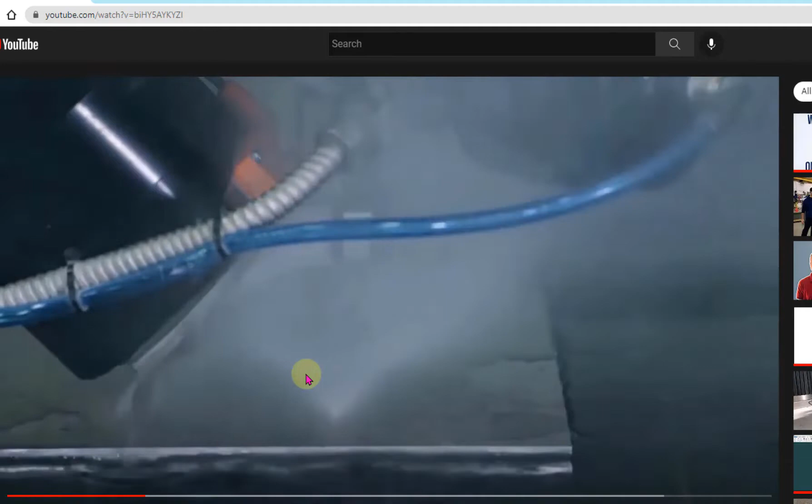Today we'll be taking a look at how to program our Apex 60 5-axis head using our optional IGEMS package. We'll look at some of the nuances with the programming, such as placement of leads and programming the height setter that was just shown in this video here.

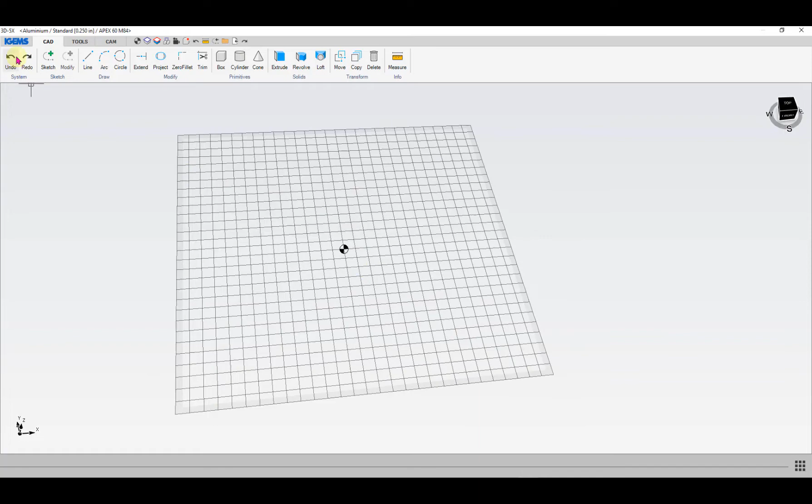And if we want to open up a 3D file, top left hand corner, IGEMS menu, open, and normally you click on open and navigate to where you've got your file saved. There's also some samples here that you can play with, so we'll start with a fairly simple one here. So depending on how it's drawn, it might bring it in like this. So then you can choose how you want to orient it on your table.

Cam tab, you've got this align button here. So down at the bottom gives you some different options as far as how you want to align this to your table surface. If I click on this surface here, for example, it'll just lay the part down like that on the table.

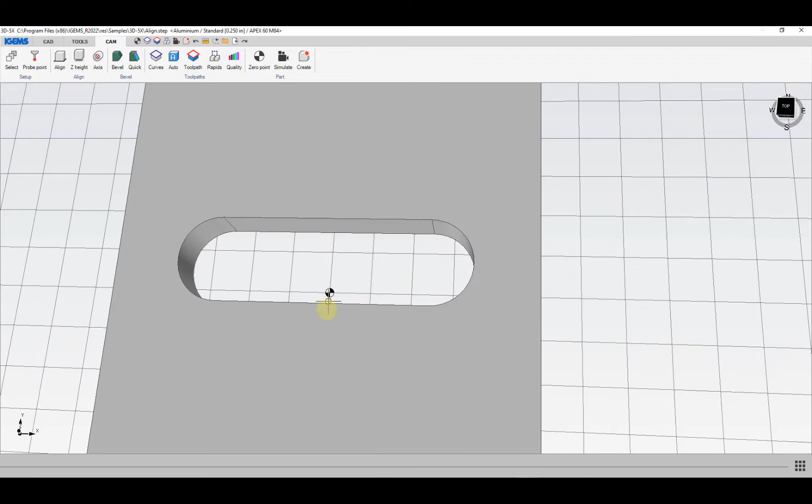So the first thing I usually suggest doing is setting the 0 point where you want it on your part. Right now the 0 point is here. Normally we're going to set it at the top of the part somewhere, and usually lower left hand corner if we're just doing a single part. So I can click on the 0 point button here, and since my snaps are turned on, when I come close to an end point, that little red square shows up, and I can just left click and move my 0 point to the top of the part, lower left hand corner.

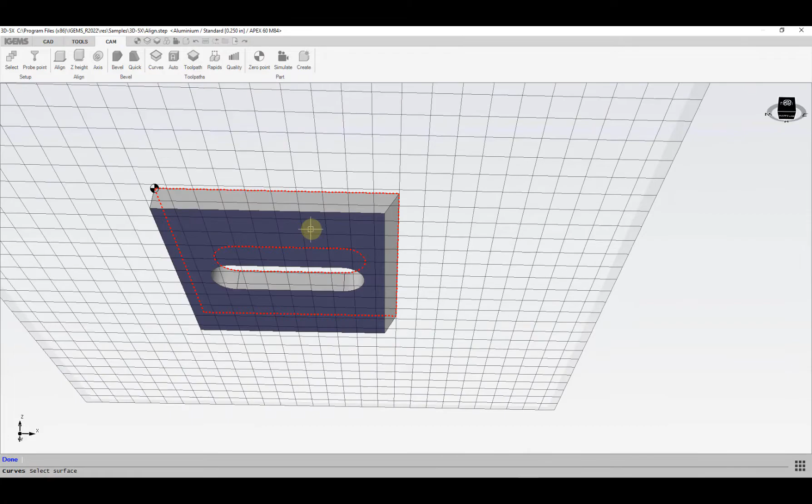And then we can go through and pick edges that IGEMS will use to project the toolpath depending on what angles it sees in the part. So to do that, we've got this curves button here. A couple ways of finding those edges. For a part like this, the easiest thing is probably just click on pick surfaces, and I can click on the top surface and then spin this around and click on the bottom surface, and it highlights in red those edges that it finds in the part. And once you've got that, just click on done.

It shows the different edges that it's found in the part. You can choose additional edges if you need to with these different options over here on the right. And now we're ready to add a toolpath. You can either click on this button here to take you straight to the toolpath area. If I click on close, I can also use this icon here to get to the area where I can add toolpaths.

So in this box here, we've got all our settings for the toolpath that we'll add here, working from the top down. Cut type is basically how IGEMS is going to create the toolpath. Normally you'll have this set as ruled, where it'll look at the top and bottom edges that we just selected to determine the trajectory of the stream. You can do a fixed, where you can just give it an angle and you really only have to give it the top edge, and then you specify the angle that you want the cutting head to be fixed at.

And then variable uses the top edge and then gives you a lot of control over how that stream goes after it goes past that top curve there. So most of the time you'll leave that as ruled. And then tool position is normally for most sheet cutting going to be set to fixed Z. If you're cutting something like a dome or something that's got some 3D shape to it, you can set to follow, and then the Z-axis will move up and down to follow the curve. But most of the time we'll just leave that as fixed.

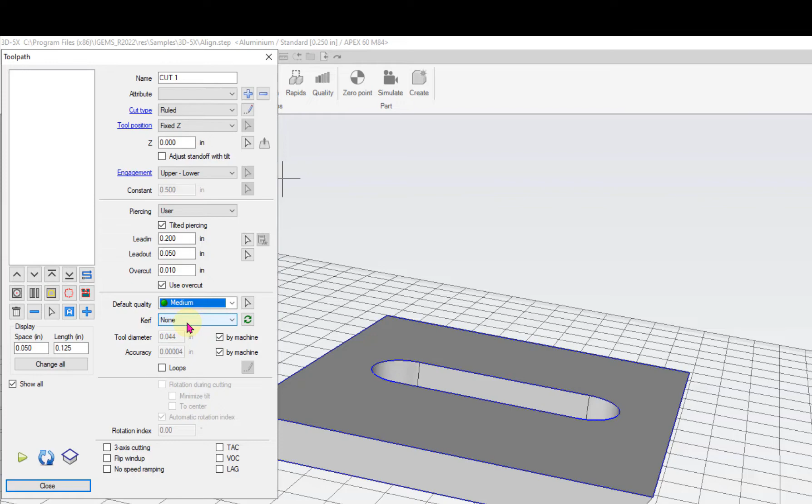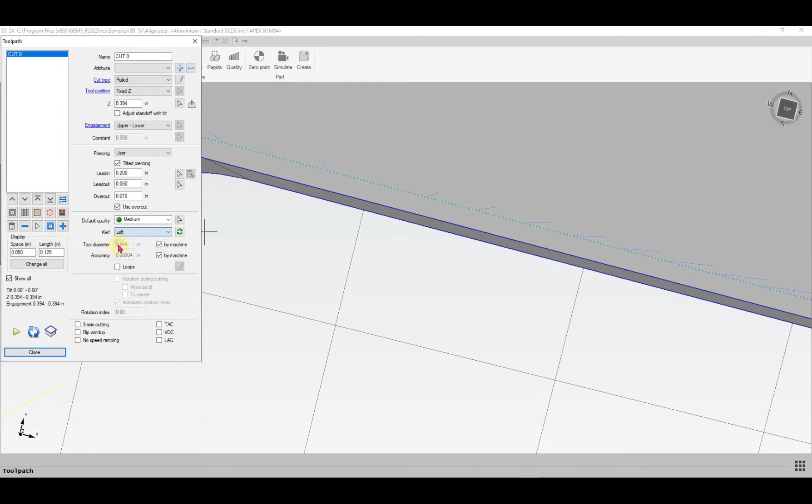So if I click on the auto button and then I left click, it'll use those settings and add my toolpath on there, and I'm just going to hit enter so we can go back and look at this box. The key thing to look at here is kerf. Right now kerf is set to none, so this green line represents the center of my stream. So if we were to cut this, this slot would end up being a bit oversized by basically half the kerf width on each side. If I set it to kerf right, that's where we would want it based on the direction of travel. You want that green line to be offset into the scrap area. And if we set this to kerf left, then we would end up being oversized on this slot by twice the kerf diameter. So we'll set that to kerf right.

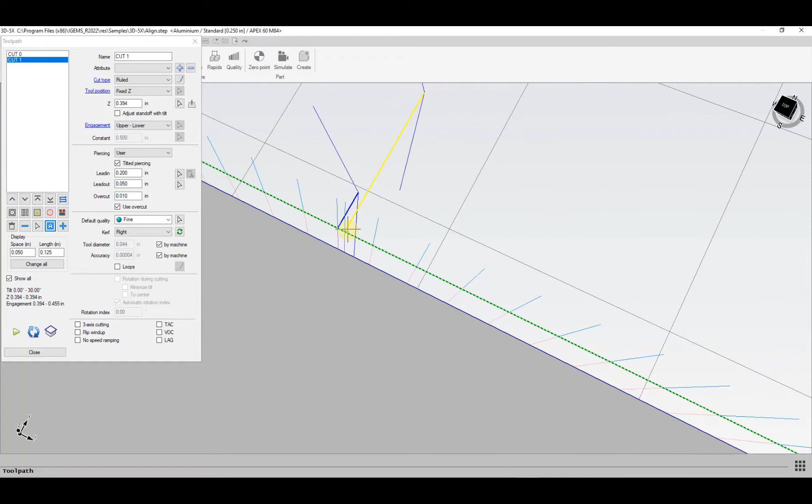If we did want to change the quality, you can click down here and choose a different quality. If we want to use those same settings for the outside, I can click on the auto button again and left click where I want to add that lead in. So we've got the lead in, and then in this case here we're actually going counterclockwise around this outside cut. You can see this overcut, so it's going to come around this outside cut, cut past where we led in, and then do the lead out. So because we had told it to kerf right on the previous cut, it carries over the kerf right and then changes the direction of travel to keep that kerf on the outside of the part into the scrap area.

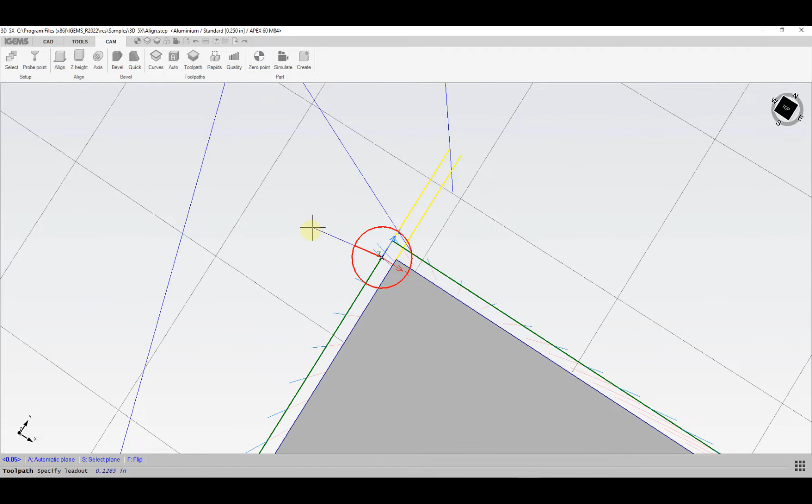If we want to change our lead position, if we wanted it on the corner here, you can click on this little button here and left click on where you want to have your lead. And then if you want to change your lead angle, we'd probably want to come in tangentially down this left edge here. This red circle represents that 0.2 of an inch long lead in that I specified, and as I move my mouse around I can determine the angle I want to lead in at. So if I want to go straight into that edge when it locks in at this 12 o'clock position, I can hit enter, and then for the lead out when it locks in at this 9 o'clock position, I can hit enter. And because we're using overcut, it's actually going to come around the corner, which we wouldn't want to do on a corner, so you can turn that overcut off and it'll just lead straight out on that corner there.

If I want to change quality, I can come down here and choose a different quality. If I want to do one edge at a different quality, I can click on this little pick button here, and it shows me right now that that cut is in the green medium.

So if I wanted to do an edge a little bit faster, I can choose a different quality, and I can left click and left click and then move my mouse around to indicate which portion of that outside cut I want to apply the rough quality to. In this case here I want to apply it to that portion of that edge. I left click and that locks that in there. And then if I'm done, I can click on done and then close.

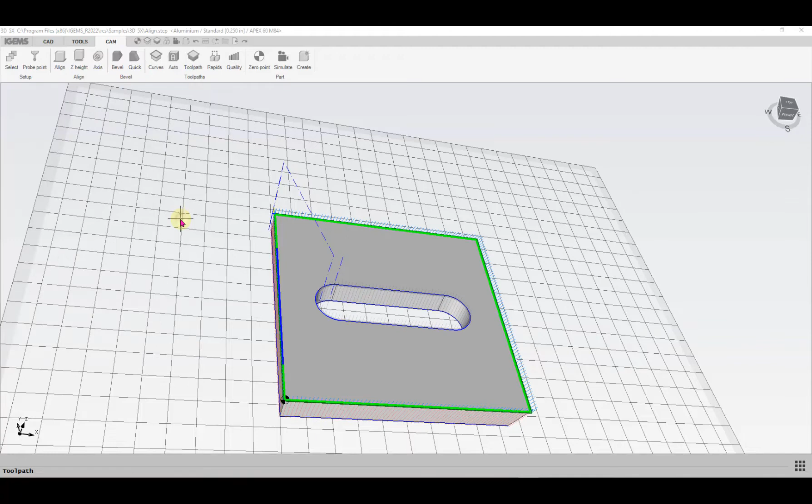If you have a cut that's got different qualities on it, the color of that little icon changes. So in this cut here, this is all at the fines, so that little icon is that color. This one changes to indicate that this has multiple cut qualities on it, and then if you click again on that, you can see where those qualities are.

If this were a smaller part and we didn't want it to fall into the tank or tip up, you can add tabs on here. You can have a tab at the lead in lead out point. In this case here on the corner, you'd set your lead out length to 0, and then you can check that use overcut box and then put in a negative number to leave a bit of a tab there, depending on how big you want that to be. As you change that, you can see where that toolpath is going to stop.

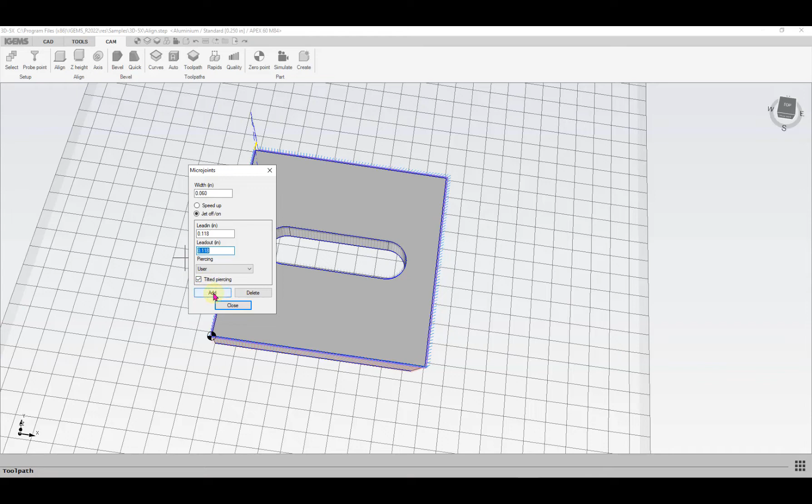If I wanted another tab on this cut, maybe on the opposite corner, somewhere over here, you've got this button here for micro joints. You can click on that. It brings up this box here where you can specify the width of your tab and then what you want to use for lead in and lead out for that tab. And again, just make sure you always have that tilted piercing box checked here. Click on add, and then you can just left click where you want to have the lead in lead out.

If you want to get rid of that tab, click on delete, and then as you hover near it, when it turns red, you can just left click on it to get rid of it. Once you've got the toolpath the way you like it, you can click on the close button.

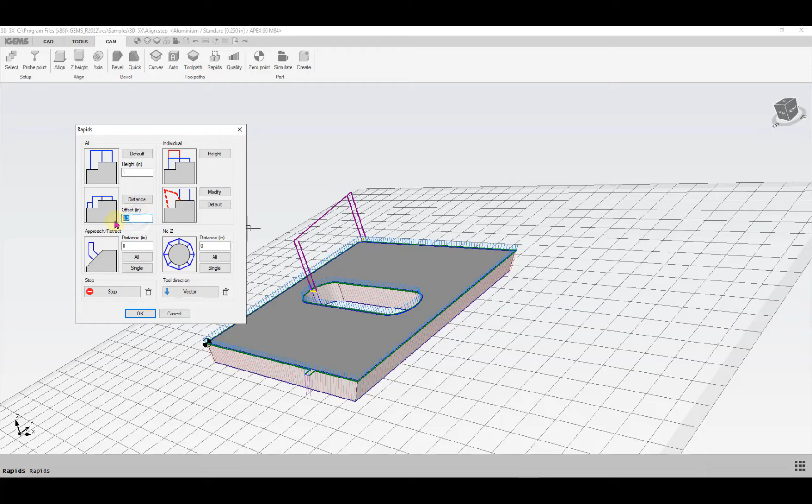And generally the next step will be to adjust rapid heights. You can click on this rapids button here, and right now it's lifting 1 inch between these cuts. If you want to change that, you can click into this box here, click on distance, and then those heights will change. You can also use this height button here, and as you hover over one of the rapids, you can type in a new number, or you can just visually drag something up and down if you just want to approximate a lift height. Click on default, and it'll set it back to where it was originally.

If you want to add a stop, maybe you wanted to stop the machine before it did this outside cut, so you could check this first cut. You've got this stop button here, and it prompts you to select a rapid. So I want to add a stop going from this inside slot to the outside cut, so click on that line there, and then you can either add the stop here or here.

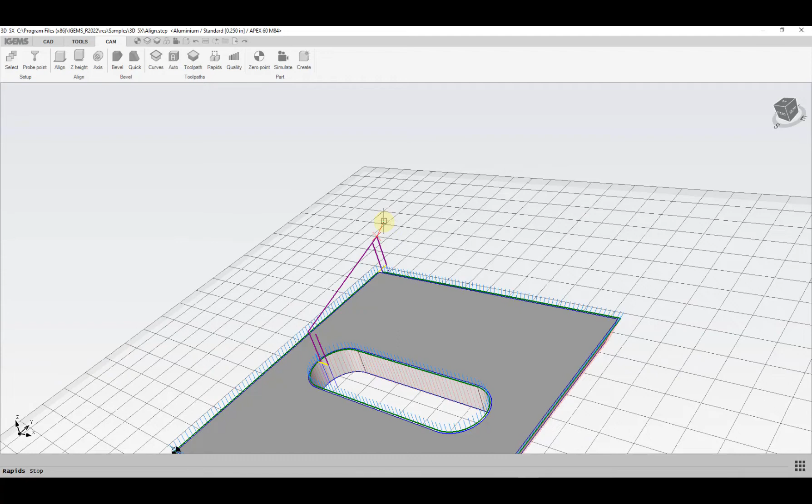So if we wanted to be able to see this slot, we'd probably want to have the stop here so it rapids a little bit out of the way, so you can left click and it puts in a stop command, and you can make it either an M00, where it's a hard stop, or M01, an optional stop that you'd have to turn on in the controller to actually have it stop at that point. If you want to get rid of that later, you've got the little delete button here, and it goes away.

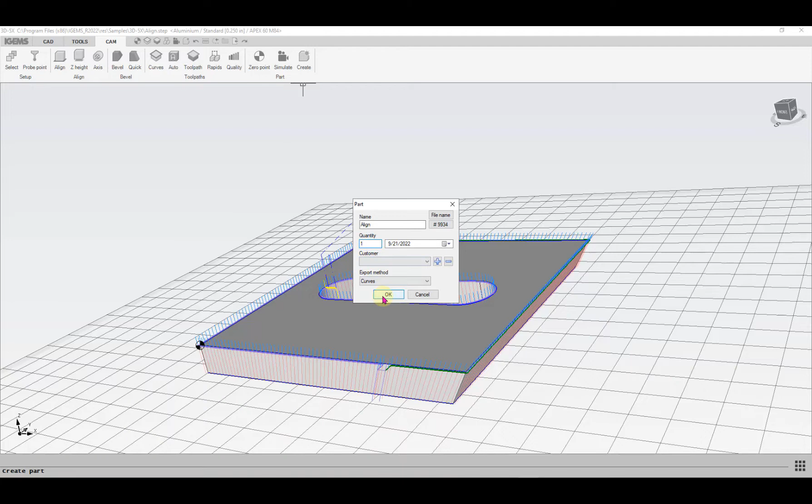And if we think that we've got things the way we like it, you can click on this create part button here, click on file name, and it'll pick up the name from the step file. You can specify a quantity for nesting now or later. I usually just set that to 1 and then change the quantity when I get to the nesting, and click on OK. It brings it out into our 2D world.

So if you're going to cut just one as your initial prototype test piece, at this point here you'd click on this order button on the cam tab back here in the 2D world. Down the bottom it prompts you to select cut order parts, so I could just select this part and hit enter. And the key thing here is you want to make sure that you click on this part button, and it'll pick up where we set that 000 point from the 3D area.

If you don't do this, then your cutting head is going to end up being too high off the material, because it's going to be basing all the values off of basically the top of the table, and it's going to add the material thickness onto your Z heights. So make sure you click on that part button, and it should show the thickness of your model at this point here.

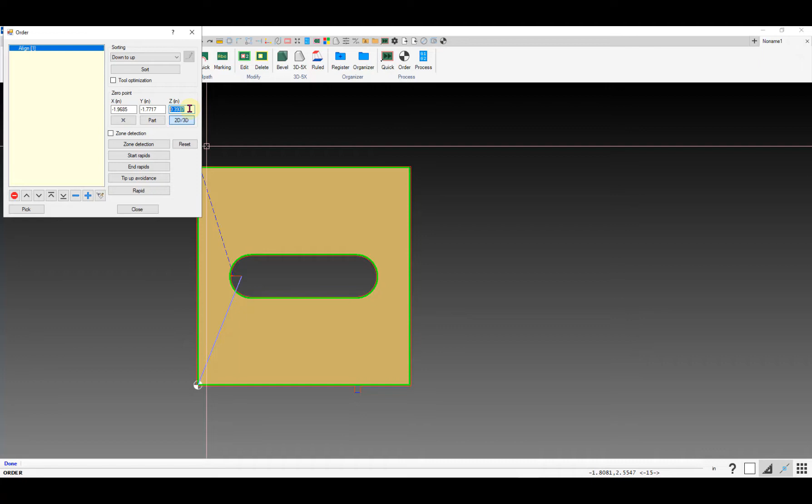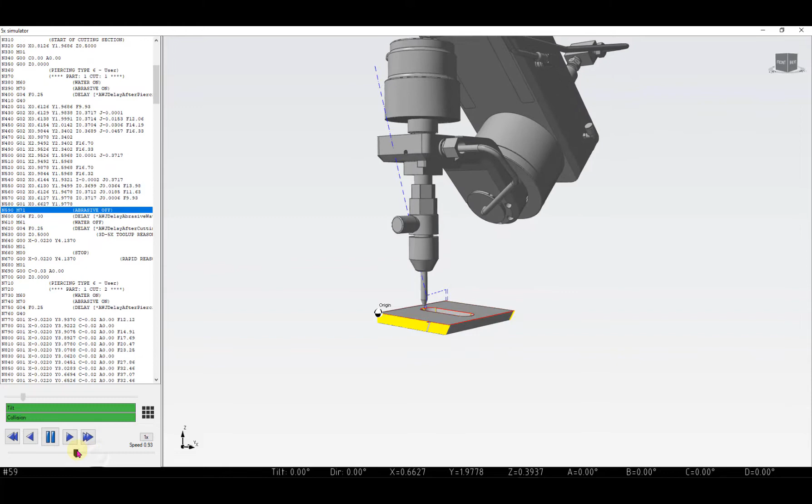And then click on the play button and get a preview of the code. So this is nice to be able to simulate and see what the cutting head's going to be doing. Got the little slider down here if you want to speed it up or slow it down. So we do our pierce, we'll come around and it starts tilting over. We got our little tab that we added on there. So it'll stop, re-pierce, and then continue on.

And if we look back in the code, here's that M00 that we put in there, that stop command going from the first slot to the outside cut. Now if you want to make any changes to that part, it's sometimes a little bit tricky for people to figure out when they first start working with this, because their inclination is going to be to click on the 3D-5X button again, which just brings you into an open empty workspace.

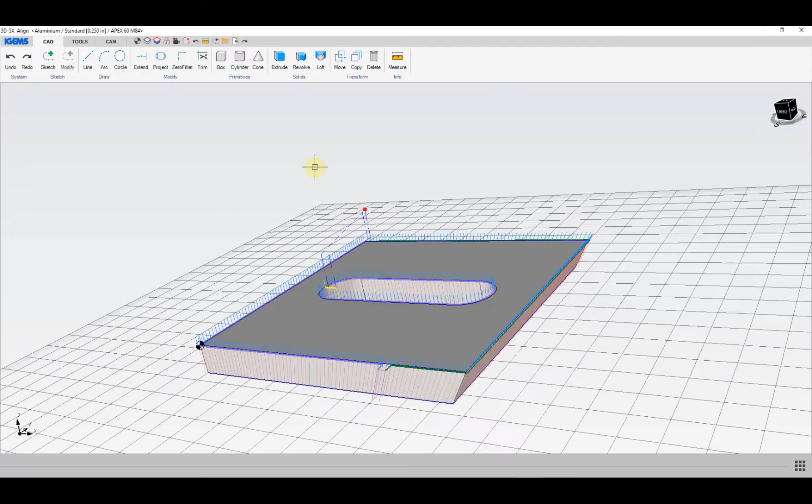So if you want to make any changes to this part, you double click on the perimeter and it brings you back into that 3D area with that part. So if I do make some changes, like I decided that I've cut my first part and I'm happy with things and I want to take out that stop command, I can go back to our cam tab, and in this case again the stop commands are under the rapids button, and I can click on delete and it goes away, click on OK. And then to update the part, I would click on create, and update part will update the part.

If you wanted to have a new part, so you'd have one part that would have that stop in there, and then a new part that doesn't have it, you click on the new part option. So we'll do update part and OK. And now that will not have that stop command in there anymore.

So now we'll talk a little bit about rewinds and singularities, which you have to pay attention to when you're programming the Apex 60 head. So if you're looking down on the Apex 60 head, these numbers here would relate to the C axis or clock axis for spinning the head around the Z axis. We can go anywhere from positive 270 degrees to negative 223. So those are the C-axis limitations.

So when it comes to placing your leads, you want to place your leads in such a position that you're hopefully not going to hit either of these limits depending on the direction that you're going around the cut. And if you are pointing to the left, like the left wall of the tank, that would correspond with a C angle of 0 degrees. And if your stream is pointing to the right as you're standing in the front of the tank, then that would correspond with either positive 180 or negative 180.

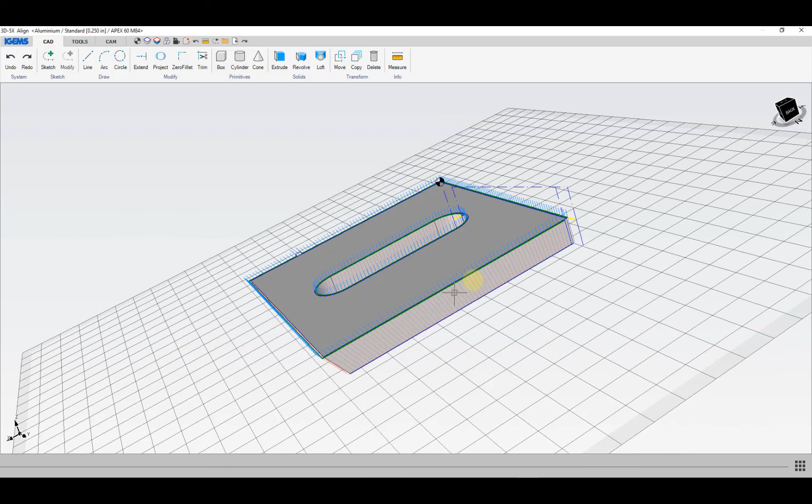But if I rotate this part, we should be able to get a singularity here. So if I go to my CAM tab, and on this Align submenu, click on Rotate, and we'll try going negative 90.

So here as it's cutting along this direction, the cutting head will be pointing towards the back of the machine, so that should be C of negative 90, and we'll be tilting through that 10 degrees on the A, which should give us singularities on each side here.

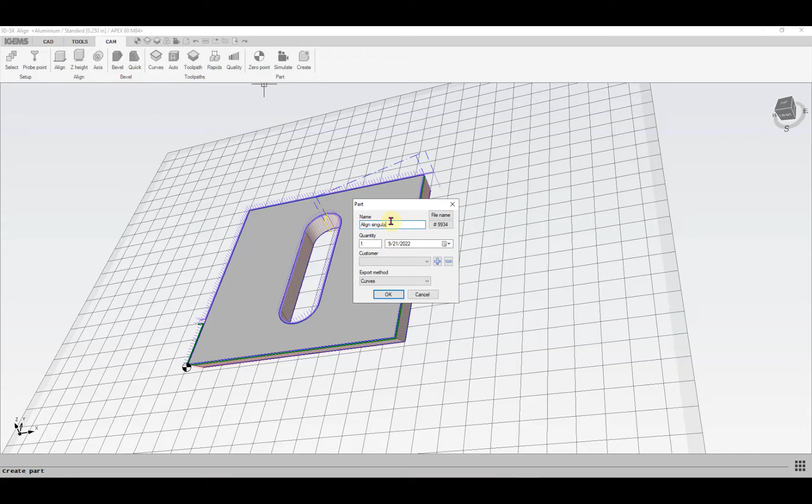So we'll go ahead and create the part, and we're going to do a new part. Original part on the left, new part here on the right. We want to set our 0 point again, make sure you click on that part button to pick up the 0 point from the 3D area, and we'll process it. This time it wants to know which one we want to process, so click on this dotted line here to tell it that this is the one I want to work with, and see what the simulation shows us.

So we got 2 singularities, and it shows you what line in the file it is. As we scroll down here, coming along this edge, our C is at negative 90, and the A is going larger and larger, passing through 10 degrees. We'll have a singularity, the cutting head will spin around there and probably give us a ding on the part.

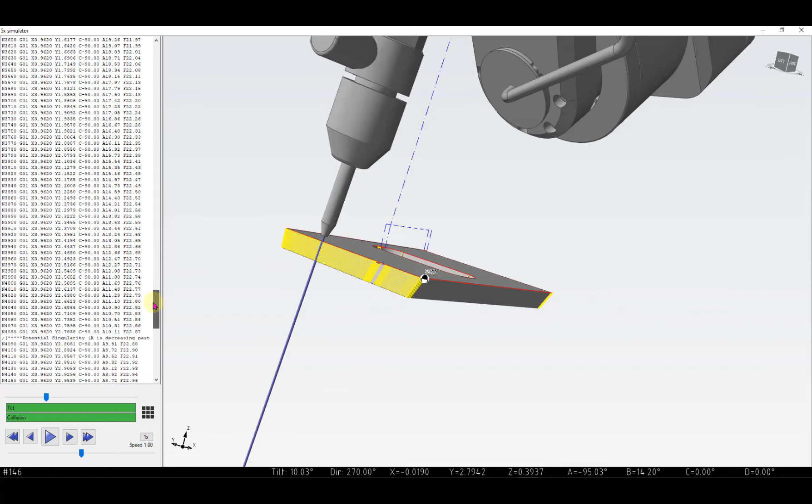And then after it re-pierces after that tab, going up the other side, again here the A is decreasing and passes through 10 degrees with the C at negative 90.

So just want to be careful about that. If you have a part where you can get singularities like this, then when you nest it, you want to make sure that you set the rotation to none, because you don't want the nesting to rotate this part and give you singularities.

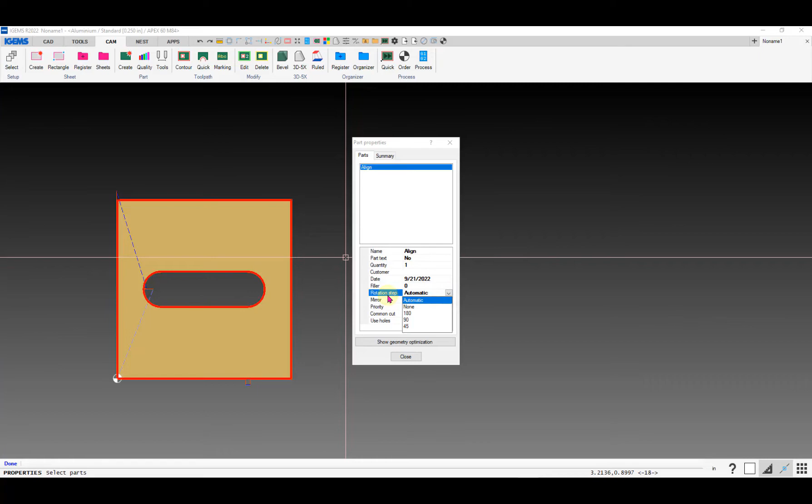So to set that rotation, on the Cam tab, Parts submenu, Properties, you can click on the part, hit enter, and change your default rotation step to be none. That way when you nest it, it won't get spun around and give you singularities.

So let's go ahead and nest this. We'll just nest 10 of them. As you can see, the rotation step is now none. We'll give it a sheet size here, and actually change my start corner. Stop and OK, so they'll all be in the same orientation as the original part.

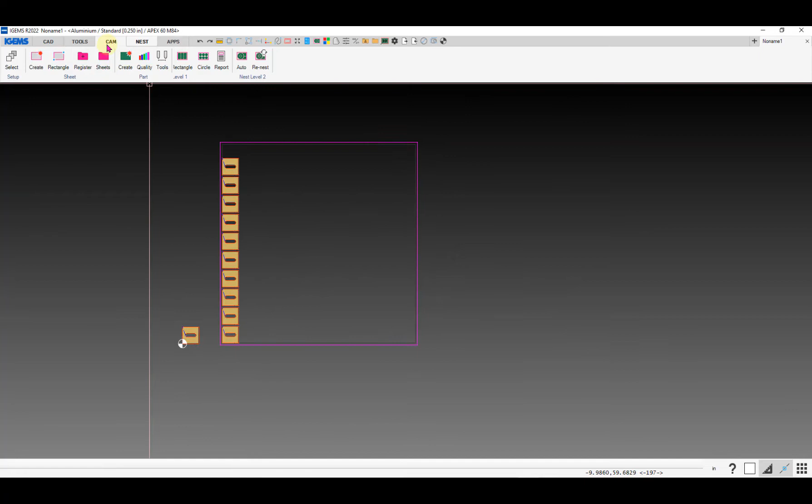Key thing when you nest 3D 5-axis parts: when you do the order button for the sheet, rather than clicking the part button, because if I click on the part button, it's going to move my 000 point to the corner of that part. Ultimately, we want it on the corner of the sheet.

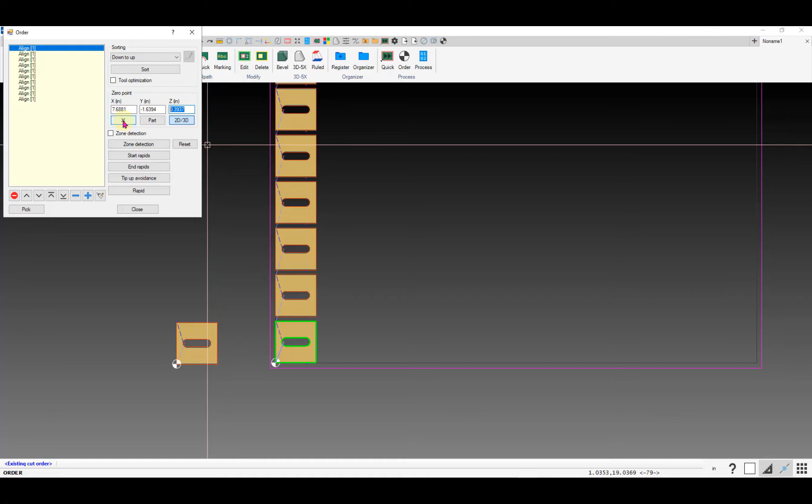So let's undo what I just did there, Control Z, and set our 000 point again here. Rather than clicking on part, if it's a nest, what you want to do is click on this 2D 3D button and use the thickness or Z value we had from the individual part. One way to do that is click on the part initially, highlight and copy that with Control C, then use this pick button to move the 000 point back to the corner of the sheet. Click on the 2D 3D button, and then you can Control V, paste that value back in there.

So if we go down to the bottom here, got no rewinds, no singularities on that entire nest. That's good. So if you were to forget that step as far as changing that Z on the nest...

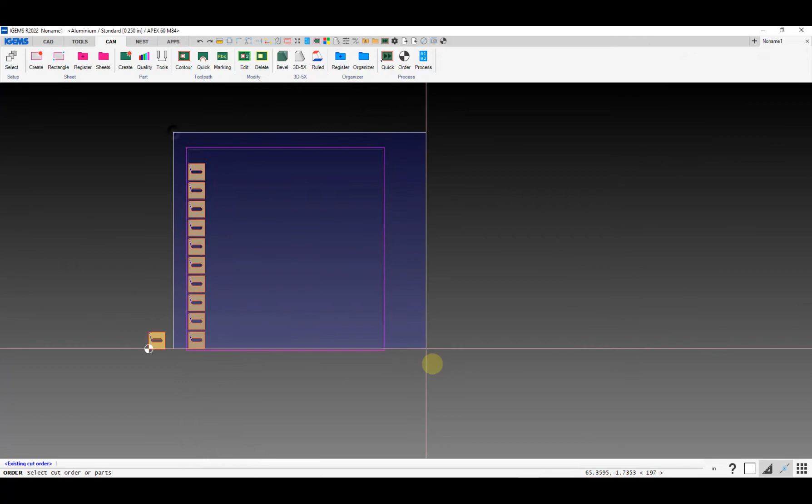I have built a warning into the post processor. So if I just click close at this point and then go and process it, you will get this warning here: check 000 position. Either you've got your 000 position in the wrong location on the 3D-5X part, or when you did the order command you forgot to move it to the top of the part. So that's a little check there that I've built in.

So you would then go back in here again and click on this and plug in that thickness.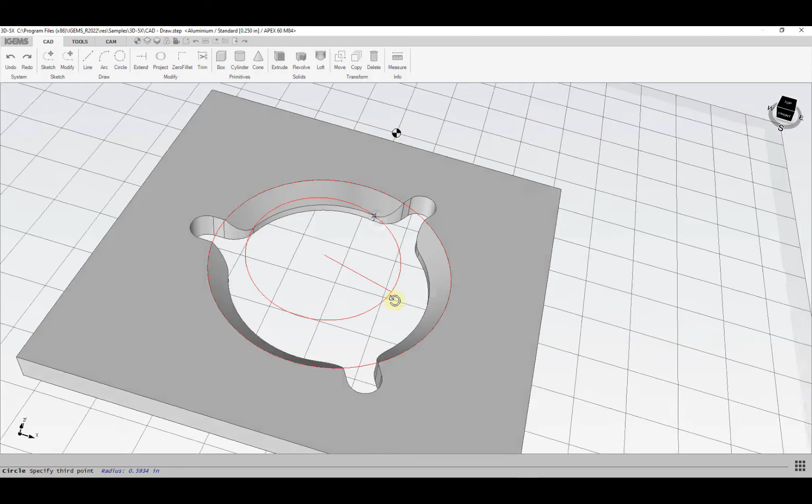But on the CAD tab, we've got some tools that allow us to draw in some lines and things if we need to, some construction lines to work with. So I'll use the circle command here. It's a 3-point circle, so if I pick 3 points along this top circle here and then hit enter, do the same thing on this area here, pick 3 points. Now that we've got that, we can go ahead and pick some edges.

Other thing to note on this model here is it's floating off in space. So on our Cam tab, you can do the align like we did before, or you can also use this Z height button here. Right now the bottom is 0.197 off the table, so we just change that to 0, and that's another way to get your part position where you want it on the table.

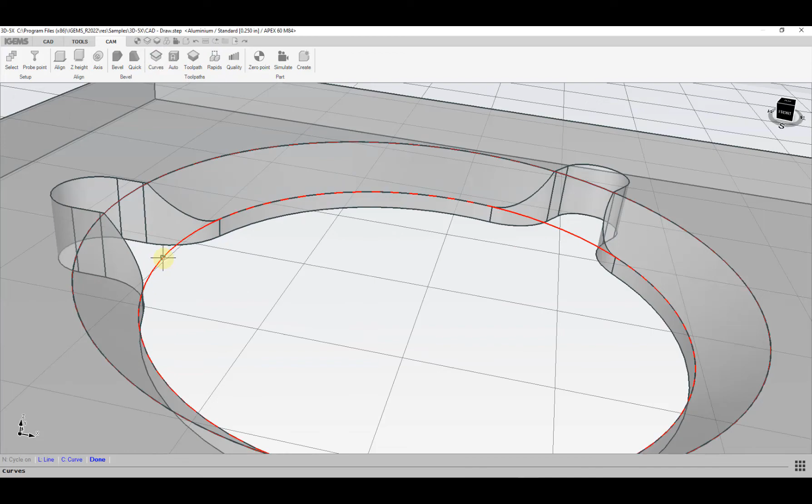And then move our 0 point, so we'll do the 0 point command and stick that at the top of the part, lower left hand corner there. Then we'll go ahead and click curves and pick edges, and we'll choose that as one edge, and then we'll choose this as the other edge that we need for right now. We'll come back and do the vertical cuts later.

So now I've got that, can go to our toolpath area and see what we got for settings here from before. Length of lead in, we're not going to be using any overcut. Yeah, we'll use overcut on this here, so we use overcut. We'll go ahead and set this to be kerf right. Click on our plus button, upper curve, this one will pierce here. Gonna hit enter because we're gonna go all the way around here. We'll go clockwise and then choose our lower curve and do our lead in and lead out there.

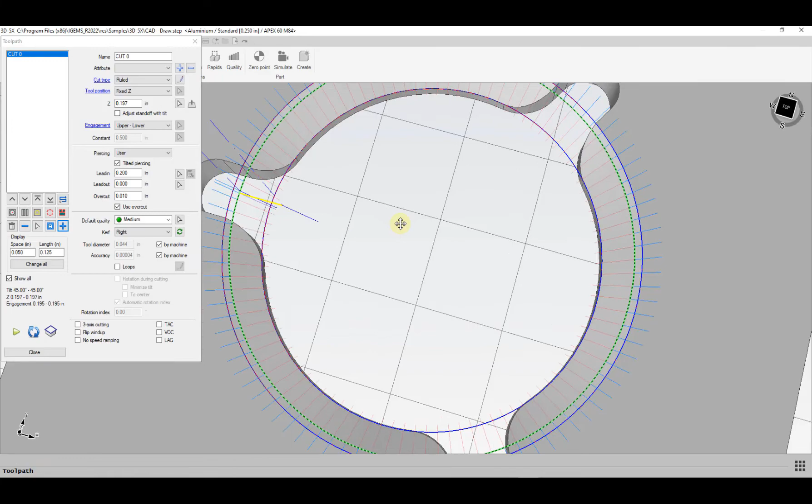So we'll go ahead and close, and for rapids we'll adjust our rapid heights. We'll just do a little lift there, and then create part, click on file name, click OK. There's the new part. So set our 0 point, make sure you click on the part button, quick process.

Here we see we have no rewinds, as I would expect, because we are pointing at the beginning here, pointing at C of 180, and since we are going clockwise, the C value gets smaller and smaller, and at the end of the cut we end up at negative 180.

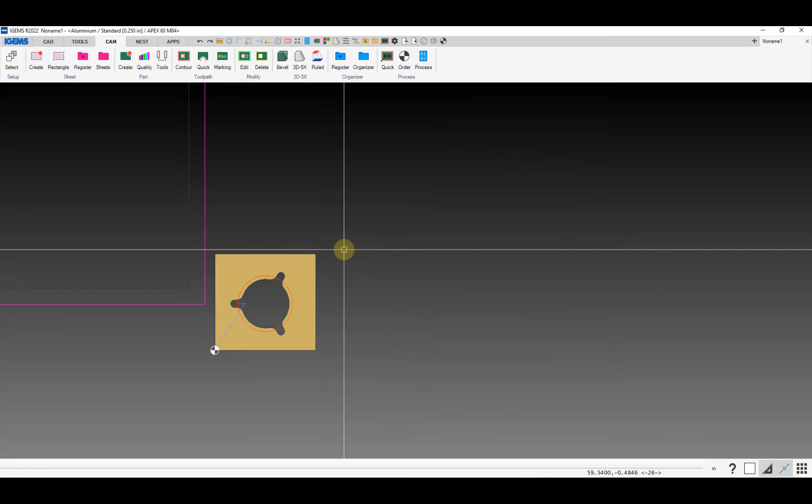However, if I do rotate this part, or if when I was in 3D-5X I'd put that lead in the wrong place, I'll just do R for rotate, and we'll rotate this 180 degrees, and then just set our 0 point again here.

So now we got a rewind, shows you what line it's at, and now we've got the C starting at 0 and it gets smaller and smaller, and then once it gets to around negative 223 it'll do the rewind and then picks up again. We've got a little bit of a buffer on that negative 223 number, which is why this one stopped at 213.

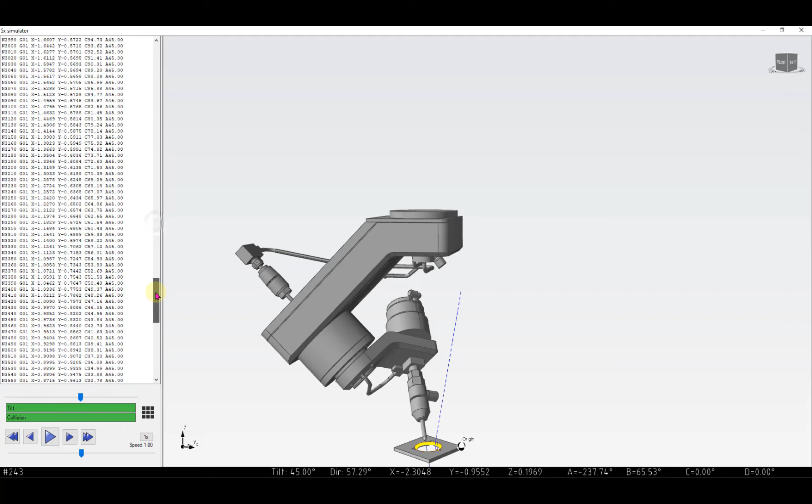So that's rewind. Again, to fix that, if my part were already programmed in this orientation, then I could double click on there and change the part in 3D-5X. Of course, this is the original orientation of that part.

But if I rotate it in here 180, this orientation would give us that rewind, so then I would come in and again use this pick button and put my lead in somewhere over here and avoid that rewind.

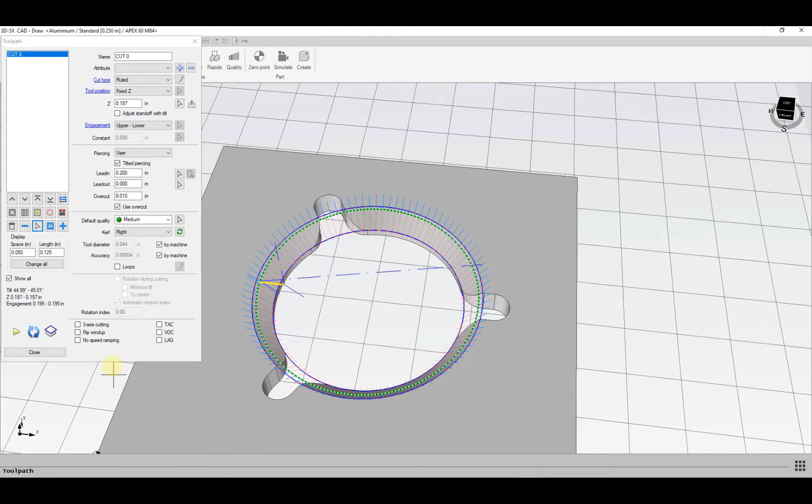And since we're here, we'll go ahead and program this vertical cut. This is kind of an interesting one where that cut is going down below the surface of the part.

So we'll go to curves and we can pick edges. Sometimes on these more complex ones it's easier to do the pick edges option. So I can either just click on the next line or down here at the bottom N on your keyboard, or just click on next and it'll find the next, what it sees as the next little line segment in the model. In this case here, it's seeing this one here.

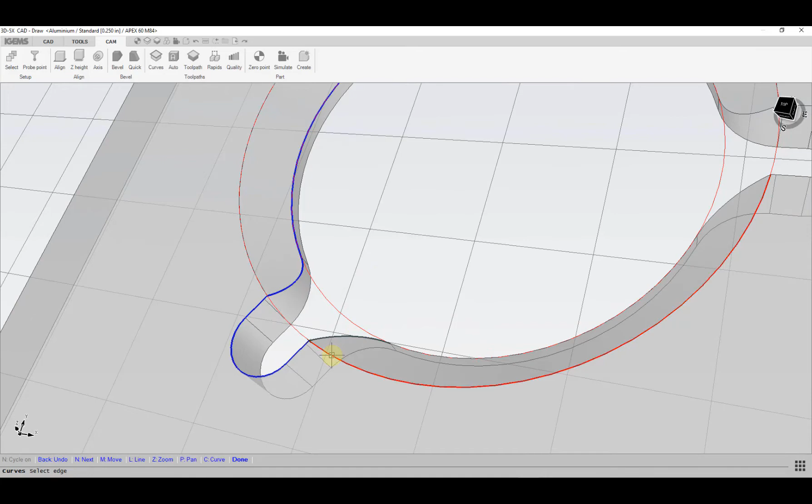If you don't want to go in that direction, we actually want to go in this direction, I can click on that line to send it in the right direction. And here we don't want to go that way, we want to go this way, so I left click on that and then keep doing that N command. And here again we want to go this way and left click on that.

And if you do end up going the wrong way, like I did here, down at the bottom, you can just hit the backspace key and then send it in the direction that you actually want to go. Click on Done.

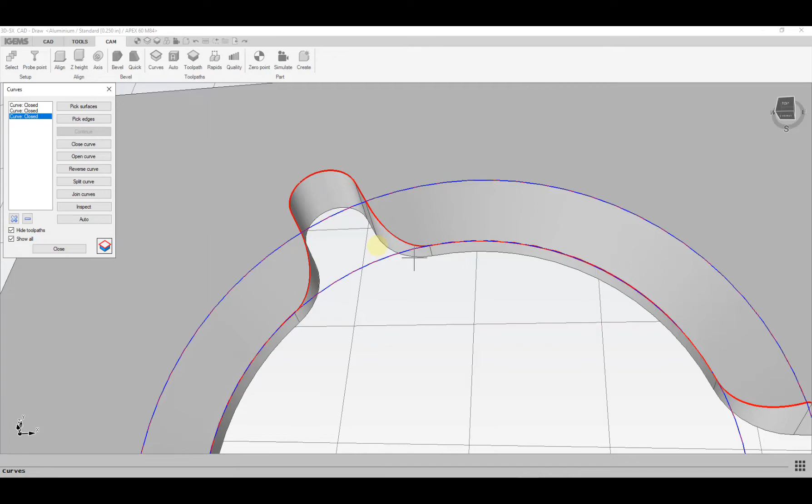Now, since this cut is going to be a vertical cut, I really don't need to choose a bottom edge. So I'll show you how that will work. You could choose the bottom edge if you wanted to, but for vertical cuts you really don't need to choose a bottom edge unless for the speed calculation you need that for the engagement.

So we'll click on our Toolpath, and we'll click on our plus button, select upper curve here, and then where we want to pierce, we'll go ahead and pierce the same location we're doing the bevel pierce. Endpoint, hit enter, direction of travel, and then lower curve. Since I didn't select a lower curve, I can just hit enter and then give it the lead in and lead out information again. Now in this one, the engagement is set to upper to lower.

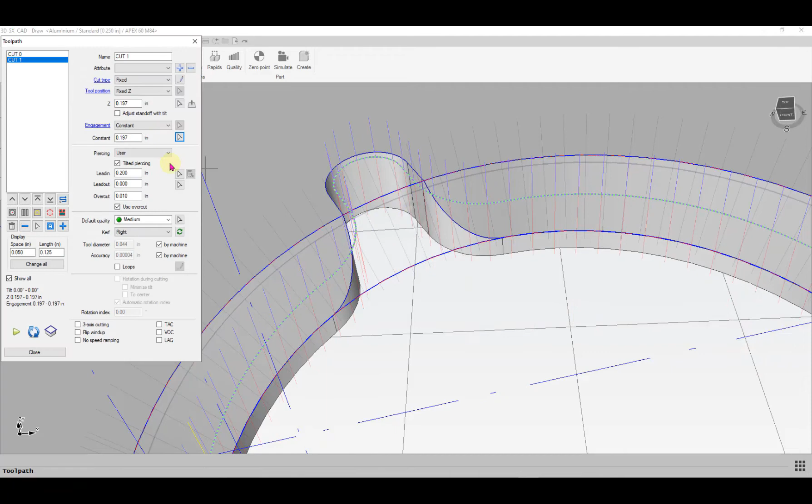However, since I didn't choose a lower curve on this, that's not really going to give us valid speeds. So you'd want to change this, in this case, to constant. And then if you don't know the thickness of the model, you can click on this little point here, and you can click 2 points here, and it'll pick up the thickness of the model, and it's going to use that as your feed rate on that cut.

So on this cut here, we had it set to upper to lower, so it's going to calculate the feed rate from this upper edge that we selected down to this lower edge, which will be alright. We're cutting through some additional material down here at the bottom, but it's in the scrap area, so that's really not going to affect our speeds that much or need us to change that speed.

If you did want to cut slower to account for cutting through the entire thickness of the material down to the table, you could switch this to upper to table, and then those red lines you see extended down, that's the additional distance that it would use to calculate the feed rate. So it would cut that a little bit slower, because now it's looking at cutting through that entire thickness of the material. But again, since this is pretty much scrap area that's going to be cut off anyways, you could probably just keep this as upper to lower.

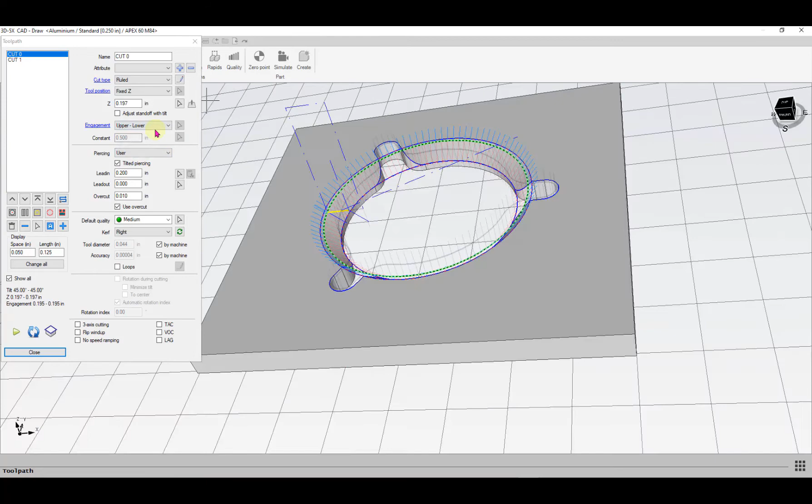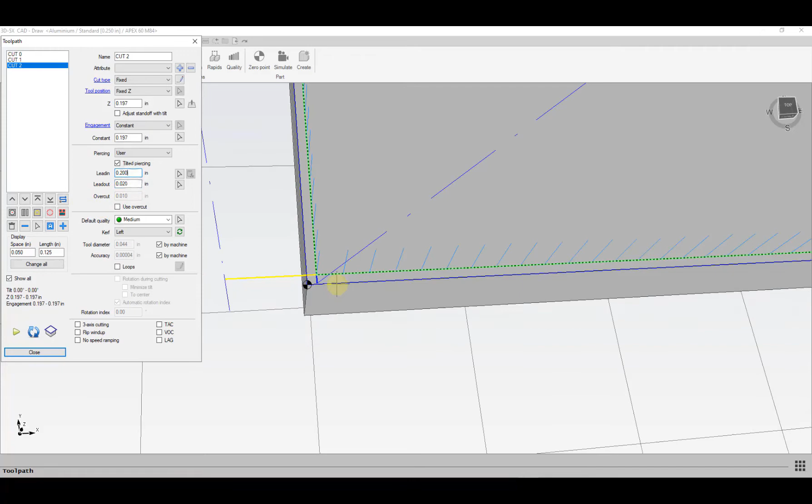And then we'll go back and just do our edges for the outside. And again, since that's just a vertical cut, I'm just going to choose that top edge. So plus button, where I want to pierce, end, and then direction of travel. And lower curve, I'm going to hit enter, and lead in and lead out. And we don't really need any overcut. Might want to give ourselves a little bit of lead out. And make sure we get the kerf on the correct side there.

A couple other things to talk about in this box that we haven't talked about. Down here at the bottom, you can choose to turn on taper angle control. So this will tilt the head slightly to adjust for a slight bevel that you might have on the water jet cut. As you go faster and faster, you'll have more taper top to bottom, and the taper angle control, turn that on here, it'll tilt the head slightly to adjust for that. So you can apply that per cut. If you want to do that on all the cuts, you can. You can even do it on the bevel cut if you want.

So these TAC numbers come from your material database. If I go into my select icon here and edit my material and scroll down here a little bit. Generally for most of the materials you already have some values in here. If you've got a new material, you can basically cut a little piece like this at the rough speed and the extra fine speed and make these 4 measurements on the part, A, B, C, and D, and plug them into here. A and B and C and D are subtracted to give you these TAC, taper angle control, numbers that it's going to adjust for.

And then the other thing that IGEMS does that's pretty cool is this VOC, variable offset control. As you cut slower, your stream width, your kerf width, is going to get a little bit wider as it eats away more and more material. And the VOC will actually adjust the toolpath slightly as it comes into a corner and slows down to the low speed, and that kerf width gets slightly wider. So that's what the VOC is.

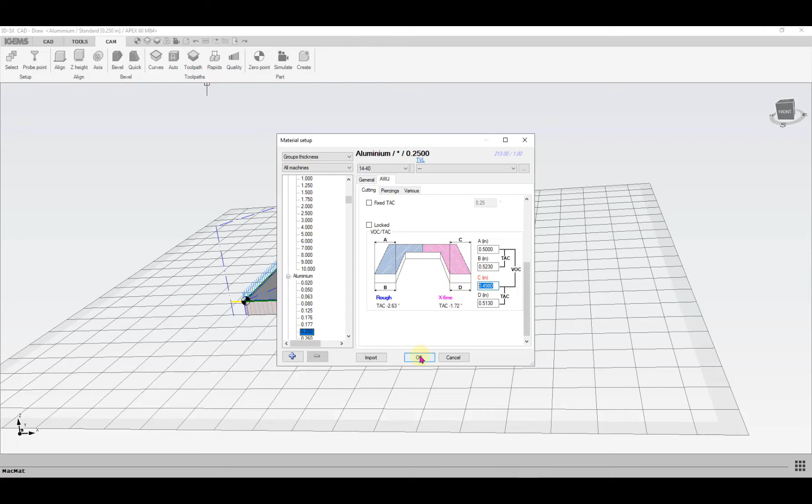So if we go back into our toolpath area, if you did want to also use VOC on the cuts, you could also select that per cut here. And then lag is a similar thing to TAC, where you can choose that to tilt the head forward slightly to adjust for the stream lag. So we'll go ahead and adjust our rapids. And then we'll go ahead and create part. And set my zero point.

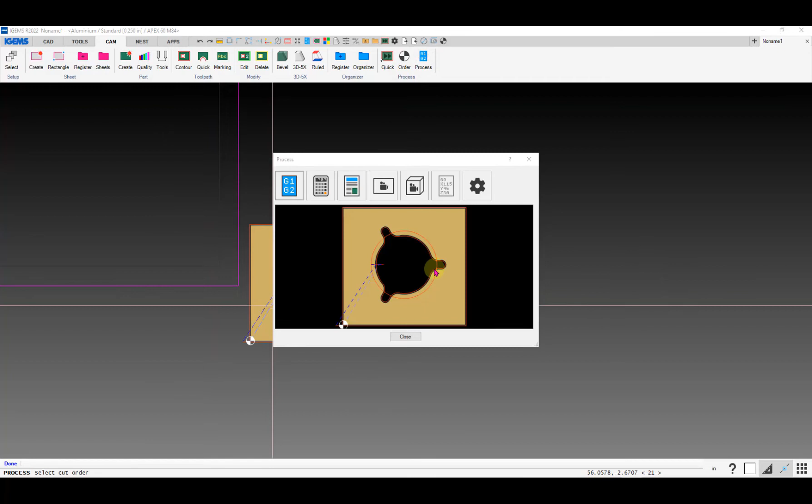And then if we actually want to use the TAC and the VOC that we turned on in the 3D-5X, you also want to click these boxes here to turn those on. If you always want to default to those being on, click on the gear, click on strategy, and in the cutting area you can set these to always default to being on, with the option to turn them off. So no rewinds, no singularities.

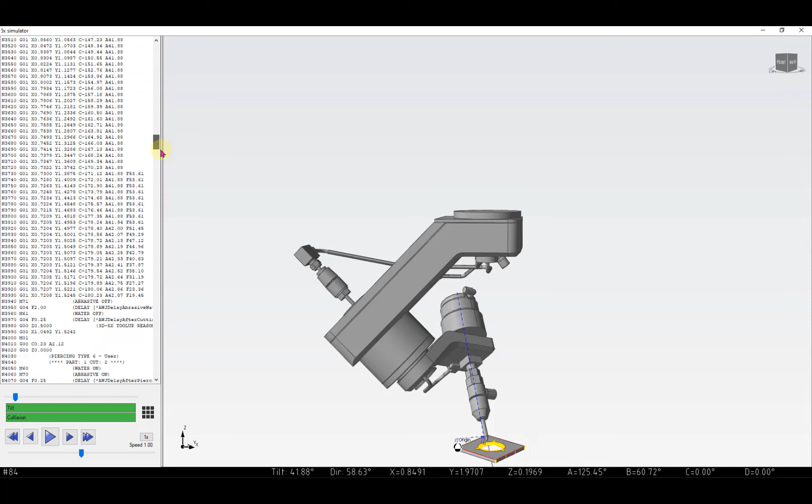And we'll see on this cut here, this was 45 degrees, but with the TAC turned on, it calculates that as being 41.88 degrees. And then on the vertical cut, you can see we have a slight A angle there to adjust for that taper. And same thing on the outside cut.

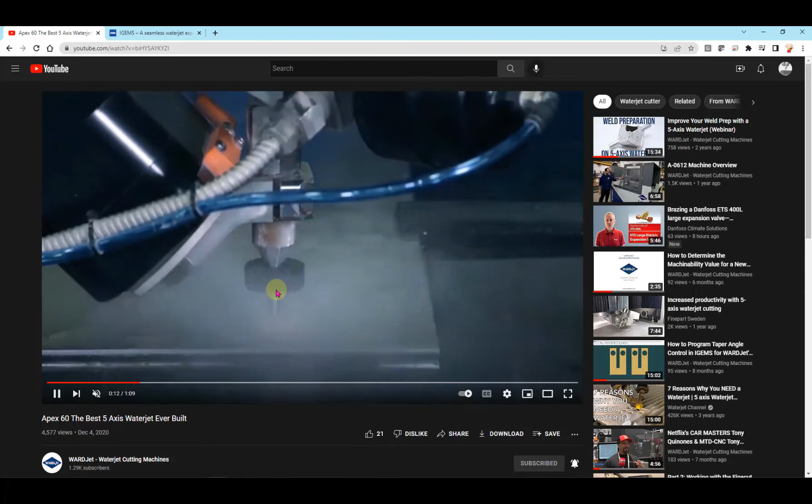Next thing I'd like to touch on is the programming of the height setter. If we go back to this video here that we saw initially, a brief clip of, the Apex 60 has an initial height setter built into it that we see here. It'll come down, find the top surface of the material to establish your standoff distance. So it's particularly nice if your material is not very flat. You can have it touch off, and there's different strategies that you can use to apply that.

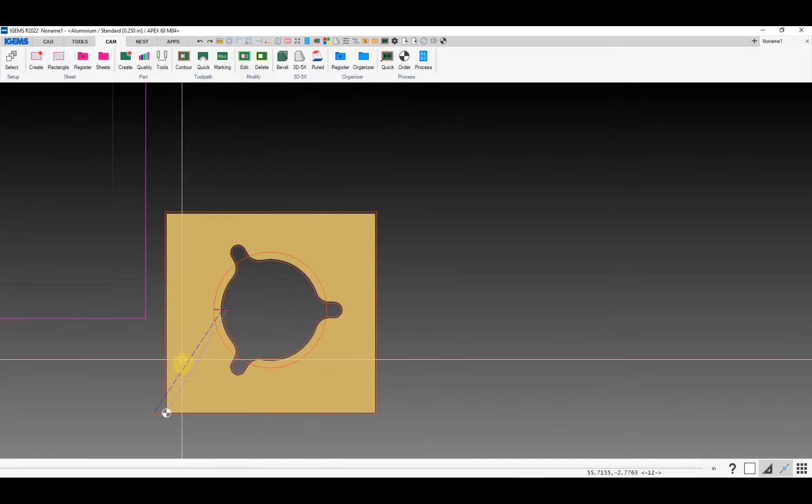You can have it touch off just on the very first pierce of a nest, you can have it touch off on the first pierce of each part, or you can give it a radius, and once it gets outside of whatever radius that you've specified, it'll do another height setter routine. So far, any of the programs I've shown you have been using programmable Z up and down. If you want to switch to using the height setter, that's a setting.

You can click on this little gear in the process area, go to strategy, and on the settings area you've got the choice between fixed Z, CNC controlled, or by height sensor, and then you can choose either sheet wise. Again, that would be just on the very first pierce of a nest, which you'd only want to do if your material was really flat. Part wise, where it'll touch off on the first pierce of each part. And then stamping, where once it gets outside, in this case a 12-inch radius from the last time that it did a height setter, it'll do another height setter.

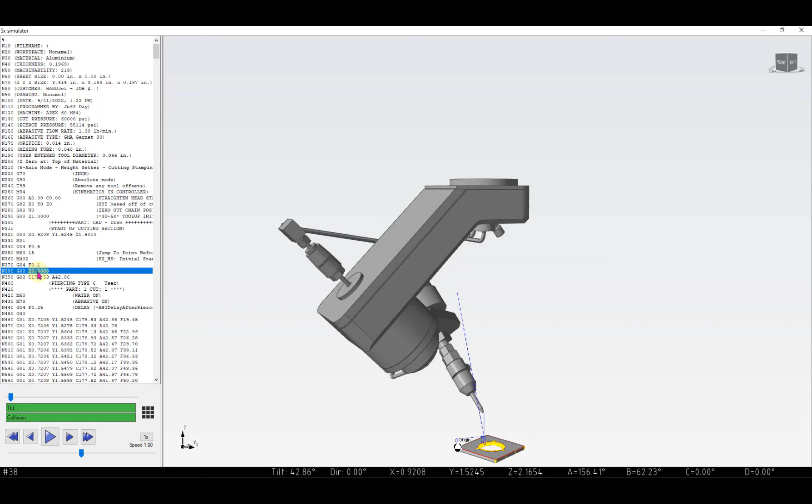So if I take a look at this part here now, we've got one height setter on this part now at the very beginning. It should always do it on the first cut. Before we had a G00 to come down, now we've got this M402 command which triggers the height setter, and then that reestablishes our new Z0 height based on where the height setter finds the top of the material.

So you can adjust how many height setters it does with those various settings, the sheet wise, part wise, or the stamping radius. You can also force it to do a height setter on a particular cut if you really want to make sure that you're at a particular height for a cut. So I'll just do a part here like this, and I'm just going to delete all those and take this into 3D-5X through this bevel option.

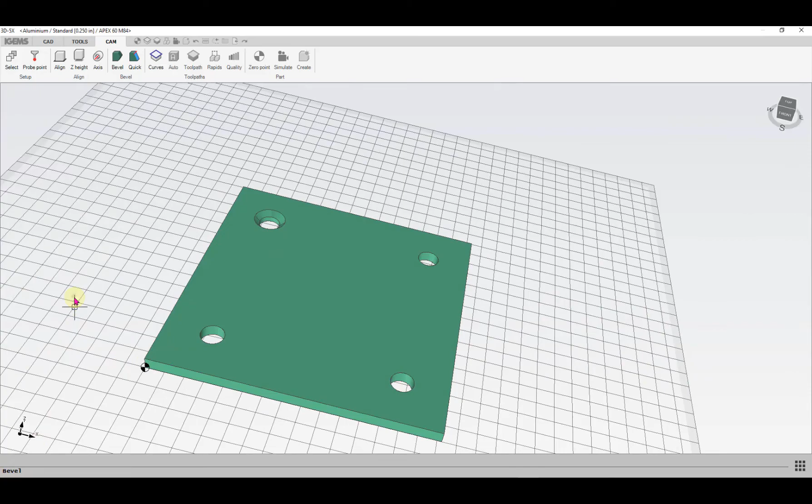So let's go ahead and add a bevel cut on here. We'll do a bevel cut like this, on that cut there. And we'll just go with that. Click on close, do curves. I'll pick surfaces, which will get those. And then for that edge in there, I'll have to go in and select that with edges. And for next, gives me that.

So if I go to toolpath, we'll go ahead and add a toolpath. I'm going to switch this back to upper to lower. So we'll add a toolpath on here. And so since that's the first cut, it should do a height setter there. And then if I wanted to make sure that it did a height setter on this bevel cut, then we would add our bevel cut.

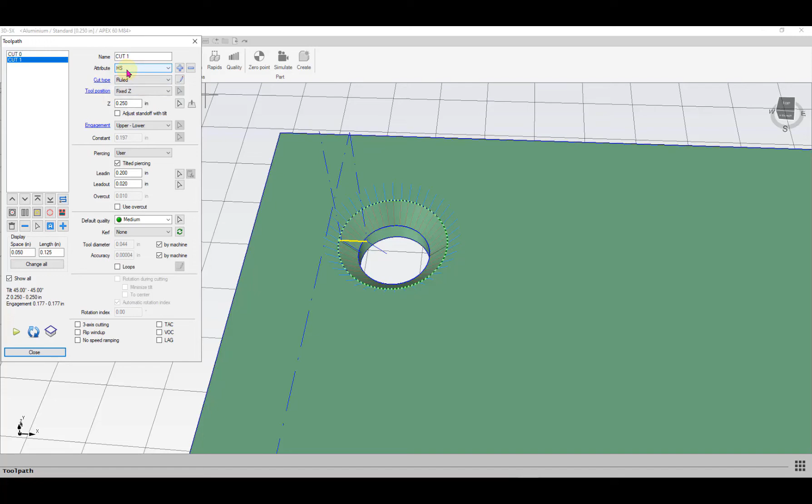And under attributes, we have this HS option here, which when the post-processor sees that code, it's going to trigger the height setter to do the height setter routine on that cut. And then we can add our cut for the vertical cut. So if I want to use the same settings, click on the auto button, and again click on our pierce point. It'll carry over that height setter attribute from the prior cut, which in this case we wouldn't want because we've already cut that bevel cut and there wouldn't be anything for the height setter to come down onto, so you can just switch that to be blank. And then from there we can use the auto button on the other cuts.

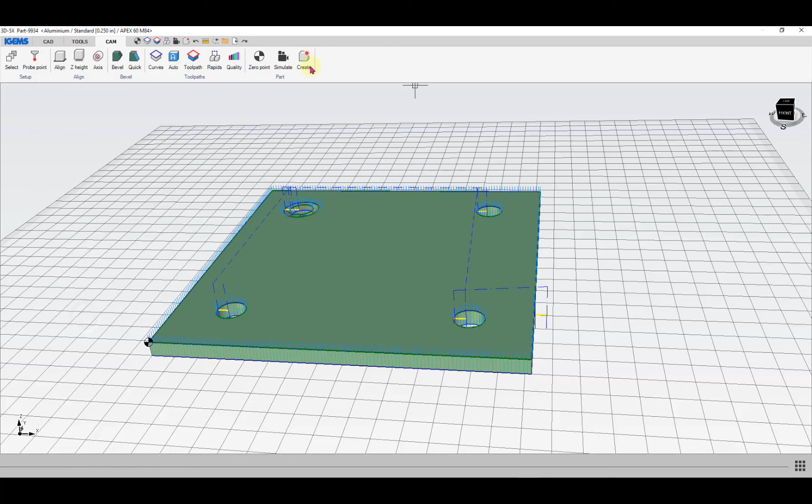So we've got the height setter attribute on that one. Close that. We've got our 0 point at the top of the part. Set our rapids. And create. And set our 0 point. Click on part. Process. And now we've got two height setters. So it'll do it on the first one again, as it should, always on the first cut, and then also on that bevel cut where we had added the height setter attribute.

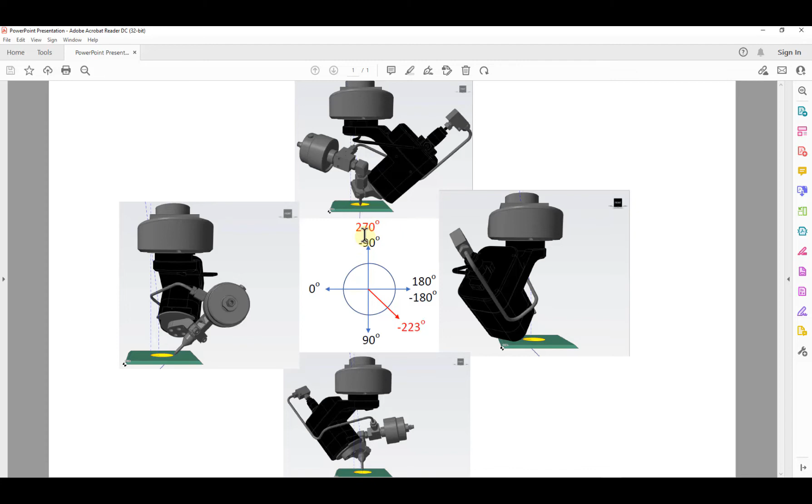Next, we'll take a look at the flip windup option in 3D-5X. Sometimes this can come in handy if IGEMS chooses the wrong value for your C starting angle. So if we refer back to this example here, pointing in this direction, it can choose either -90 or 270. So depending on the direction, it might choose the wrong one, and the flip windup can be used to choose the alternate solution.

If we take a part like this, this would be parts being cut out of foam, and we'll just program this bevel cut here. So before I forget, I'll go ahead and set my 0 point where I want it, and we'll go to curves, and I'll pick edges this time, and we'll hit enter and pick edges again, pick that, and we want to go that way. That gives us all we need.

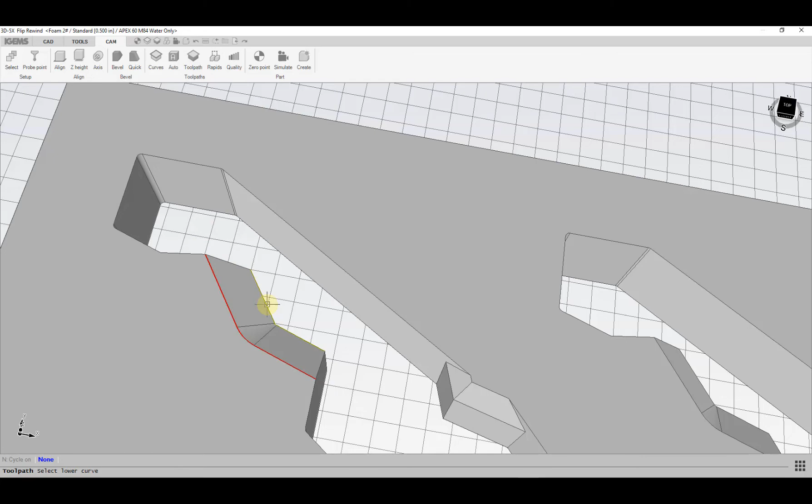Go to our toolpath area, and I'm going to be going in this direction, so I'll set curve right, click on the plus button, upper curve, start point, end point, and then click on this for a lower curve, and then give myself a little bit of lead in and lead out.

Engagement: usually for water only cutting, we'll just set the engagement to constant. So unlike abrasive cutting, you usually don't have to worry about the engagement, because usually with water only cutting you just cut at one fixed speed. Click on OK, and we'll just adjust our rapids. Being water only, you could probably just set your rapid heights to 0, since usually you don't have to worry too much about collisions with water only cutting.

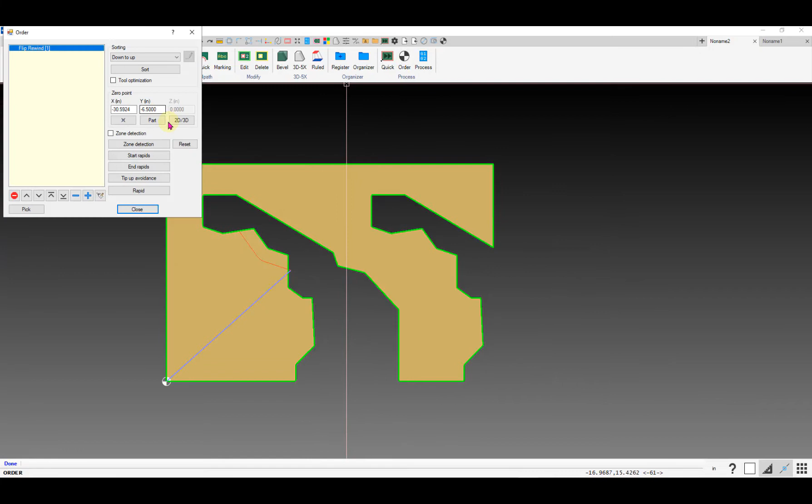And then click on create, and set our start point. Make sure we click on our part button, and see here we have a rewind. Basically at the very beginning of that cut at the pierce point it's choosing C of 270 instead of C of -90. Then once it starts the cut, it goes to C of -90 because it's going in that direction where it can't go any further past 270, so it switches it to C of -90.

So that's where the flip rewind can come in handy. Double click on the part again to edit it and go back to our tool path, and down here at the bottom you've got the flip rewind checkbox. Create, update part, and no rewind. And now we're starting at C of -90.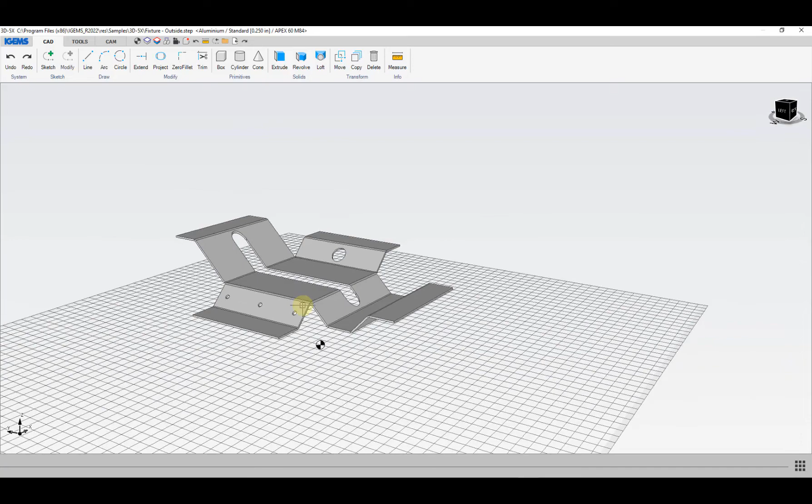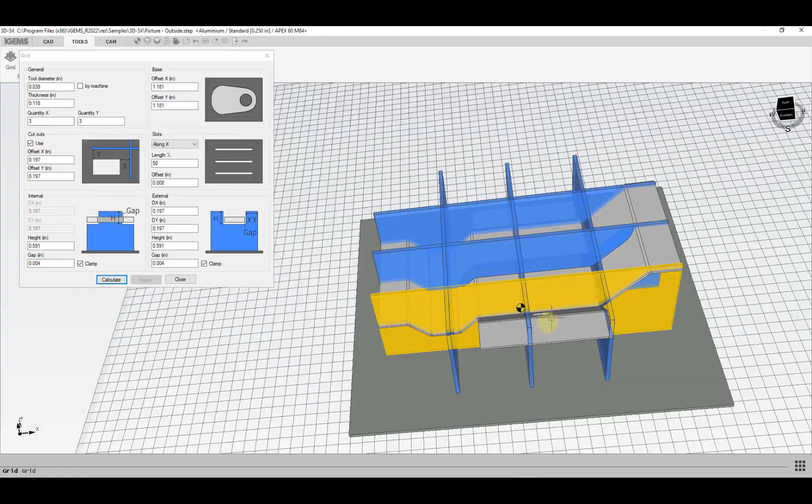So let's see where the bottom of the part is right now. The bottom of the part is 1.6 inches off. So if you need to or want to, you can move that up or down as needed. And once you've got it in a location that you like, we could rotate it if we wanted to. And then on the Tools tab, you've got this grid option here, and you can go through and create a fixture to support this.

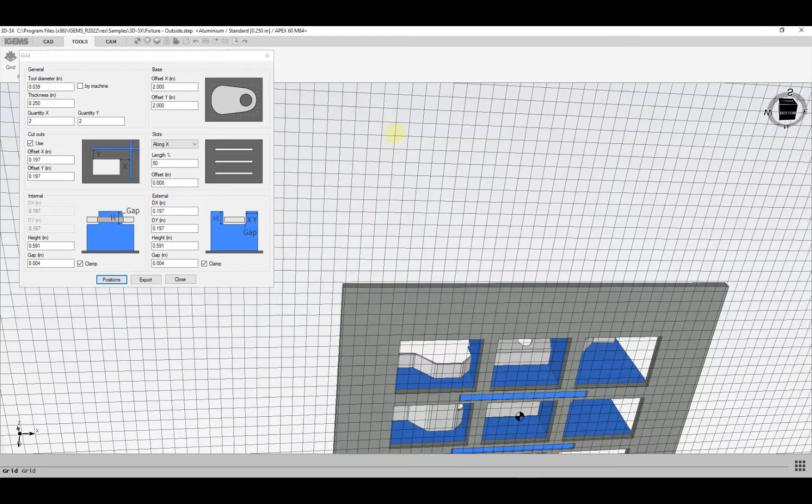So you've got your tool diameter here, thickness of the material that you're using to create the fixture, quantity X and Y are the fins that are in the fixture, and you can also click and move these around if you need to. And then you've got offset of the base, so if you want to make that base a little bit bigger, you can change those numbers. Let me click on calculate so we can see what we've built so far. This offset number here is related to the web around these slots. So if you want more meat around there, you can adjust those numbers. You can adjust the length of the slots. So it's going to make this tab and slot fixture that you can piece together.

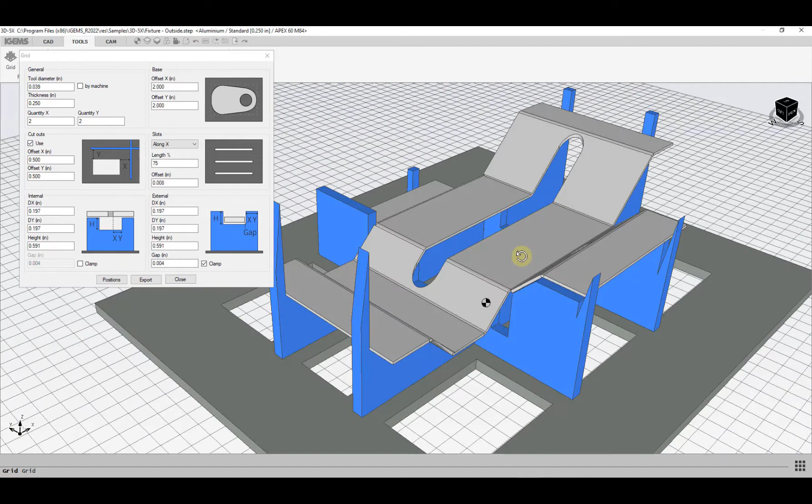And then you've also got options for these clamps, if you want to have these sticking up to help position the part, you can choose to have the clamps inside and or outside. But if we're going to be cutting this slot here in the middle, we wouldn't want the interior clamps. And then you can adjust these numbers and kind of just play with them until you get something that looks like what you need. So it's a pretty handy tool.

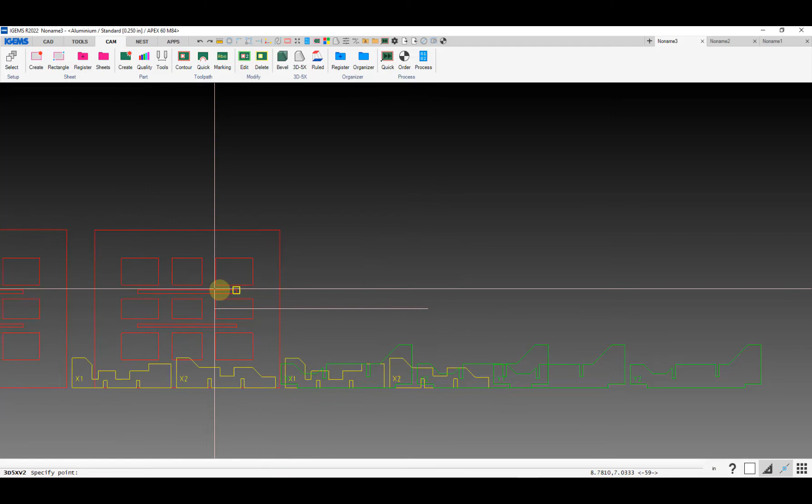And then once you've got something that you think will work for you, you can go ahead and click on export, and this puts the 2D geometry out here in the 2D world, so you can cut this later out of whatever your fixture material is. It's got the letters and numbers on there to correspond with the location of these pieces in the fixture. So Y1 would go in this slot here, Y2 would go back here, and then X1 and 2 go left to right. So you just hit enter and it will bring you back into the 3D area.

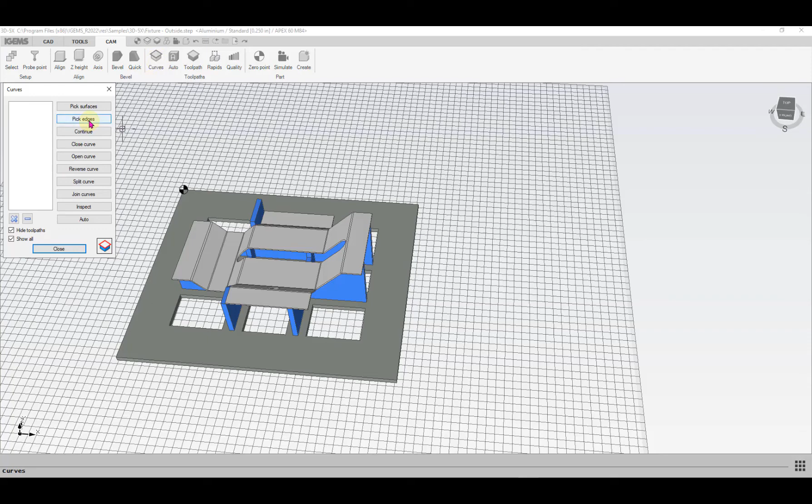So the good thing about having a fixture like this is that you can more accurately set a start point, a 0, 0 point on the fixture, versus trying to pick up a point on the part. This part might not be so bad, but if you've got a part that's all curves and doesn't have any square corners, having the fixture with a square corner, you can go to your CAM tab, pick 0 point, and put your 0 point at the corner of the fixture. And then from there we could go ahead and pick curves. So I guess we'll do edges.

And we'll follow this around. And we'll go ahead and pick the lower edge also. I think this is basically just a vertical cut. Oh, went the wrong way, hit backspace. That's good. We want to go this way. So click on Done, click on Close, Toolpath.

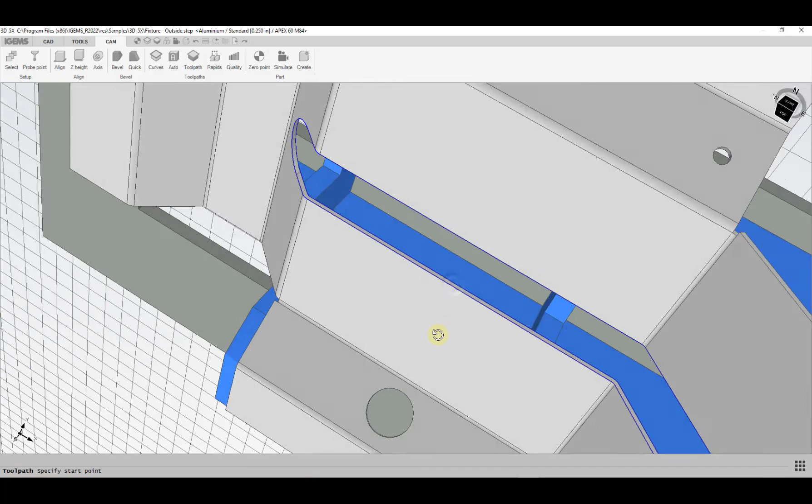So this time we're going to switch to be Follow, so our toolpath will follow the shape of the part here. Engagement, we'll set that upper to lower. And we'll click on plus and choose where we want to pierce. So upper curve and then pierce point and direction and lower curve and lead in and lead out.

So this standoff height here, you just change that to 0. That was left over from the previous part that we just did. This standoff can be used to give yourself a little bit of leeway, so if you're not quite sure how close the model matches the actual part, if you want to cut a little bit further away from the part, you can add additional standoffs.

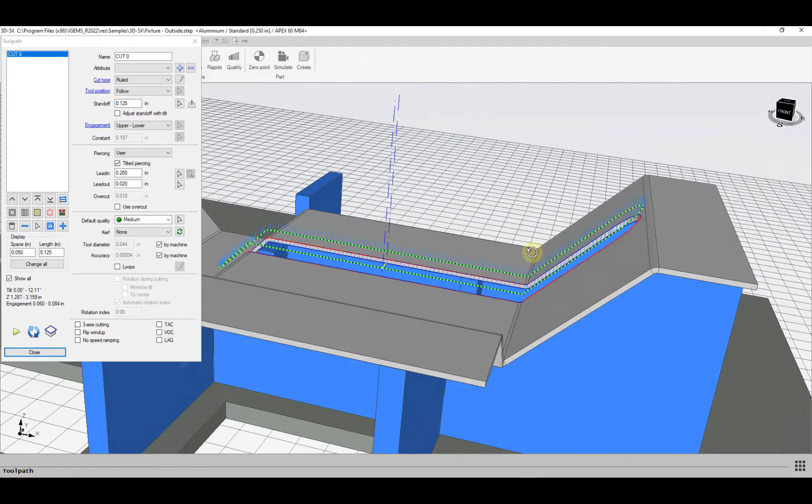So if I put 1/8 inch in here, that would add an 1/8 inch to the normal 1/8 inch that we're off our material, so we'd end up being about 1/4 inch off the material when we cut this. And then if you feel comfortable with things later on, you can drop that down some. So that's what the standoff can do for you. And that all looks good. And we can go into rapids.

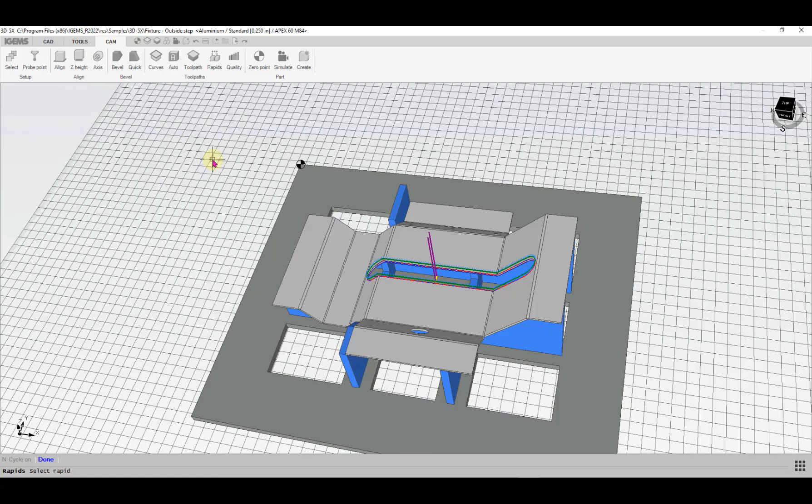So this rapids, you can also do things like adjust how you approach this cut, and at the end of the cut, if you want to rapid it away out of the way. Maybe you've got a bunch of these that you have to cut this slot out of, you can modify your rapids so at the end it just gets out of the way. So click on modify and choose the rapid that we want to modify, which would be this one here, which is at the end of the cut, because this one is for the lead in.

Click on this. So first we can tell it basically go vertical and tell it how many inches you want to lift up vertically, and turn on my ortho. So if I wanted to lift up, say, 2 inches, and then go to horizontal plane, and I want to go back 12 inches or something, get well out of the way, hit enter and done, and then click on OK and create parts.

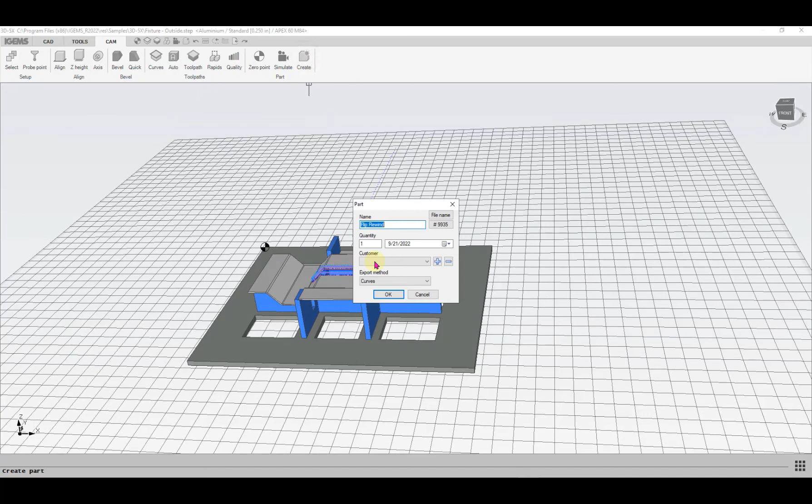So we've got these pieces here that we can cut out of our fixture material, and then the actual part that we'll be cutting. And click on our part button, so it sets our 0 point up there to correspond with that corner of the fixture. And then this might be a nice application where, rather than doing G92, where all your coordinates are based off of wherever you start your program, we could choose G54 work offset position. All the coordinates are based off of the G54 saved position in the controller. Therefore, you can basically start the cutting head wherever on the table.

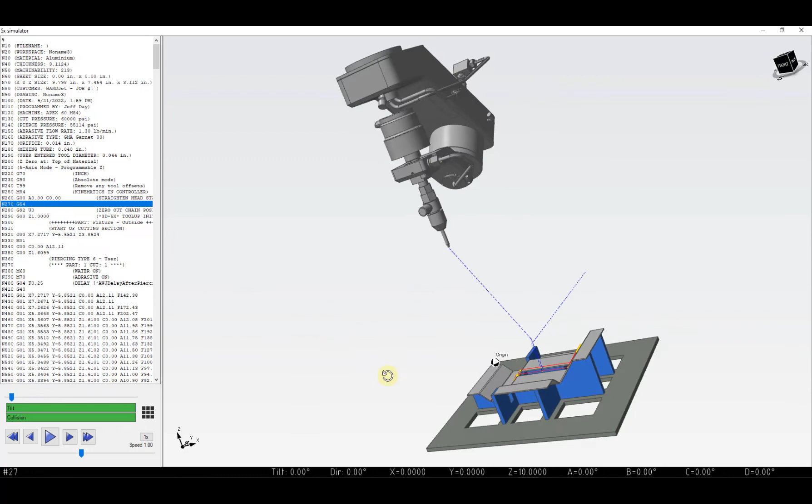So basically, instead of having a G92 X0, Y0, Z0 at the beginning of the program, we now have this G54. The controller looks and sees what the saved G54 coordinates are, which would be the back left hand corner of this fixture here. And then at the end of the program, it's going to rapid back to that point there, take this part off, clamp the next one down, and then when you hit start, because we are doing the G54, it's just going to rapid right to the pierce point. So it's going to skip this rapid. It's going to come right from where it finished right back to where it started and pierce and continue.

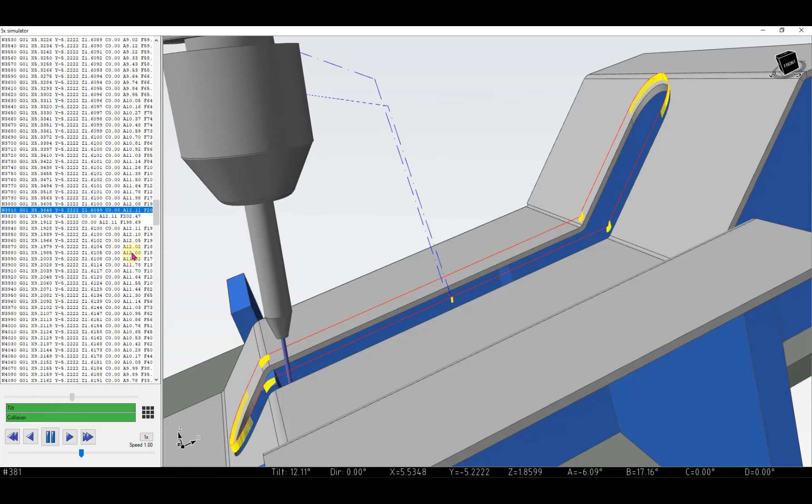So G54 is nice if you're doing a lot of repetitive work on a fixture. You don't always have to move the cutting head back to the start point again and again. Now this is putting a little bit of A and C motion in there. If this is supposed to be just a vertical cut, I'll show you one thing in here you can change. So we go back to our toolpath area. Down at the bottom you have this 3-axis cutting option. So then that will ignore any tilting of A and C.

So I think that about does it for today. Let's see what questions we've got.